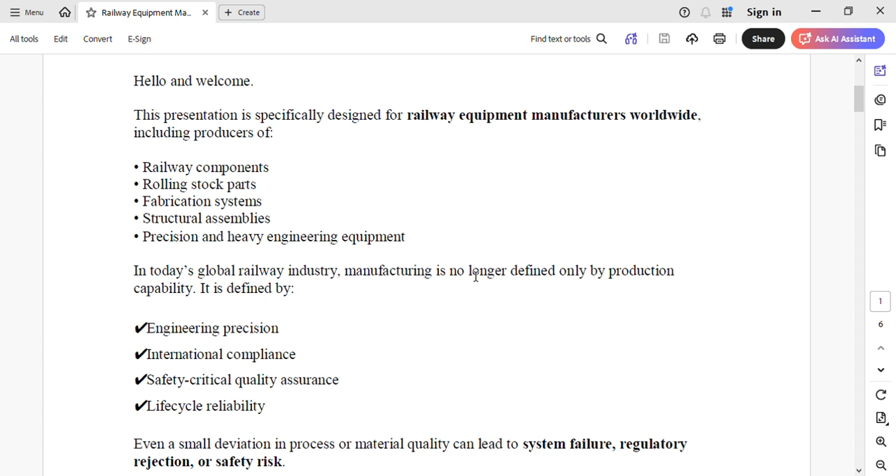In today's global railway industry, manufacturing is no longer defined only by production capability. It is defined by engineering precision, international compliance, safety critical quality assurance, and life cycle reliability. Even a small deviation in process or material quality can lead to system failure, regulatory rejection, or safety risk. This is why leading manufacturers are now focusing on structured engineering systems and ISO based quality frameworks.

Global railway industry expectations. The railway sector is one of the most safety sensitive and regulated industries in the world. Manufacturers are expected to comply with ISO 9001 quality management systems, IRIS International Railway Industry Standard, EN Railway Standards, and ASTM, DIN, BIS specifications based on regions.

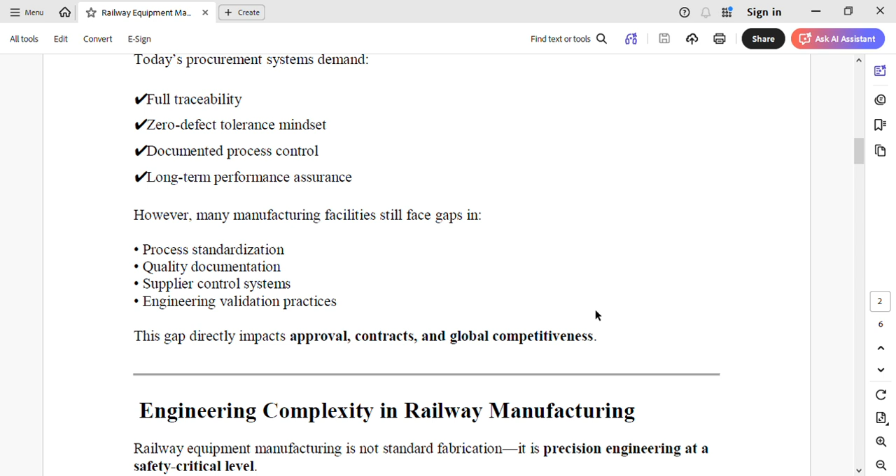Today's procurement system demands full traceability, zero defect tolerance mindset, documented process control, and long-term performance assurance. However, many manufacturing facilities still face gaps in process standardization, quality documentation, supplier control systems, and engineering validation practices. This gap directly impacts approvals, contracts, and global competitiveness.

Now, engineering complexity in railway manufacturing. Railway equipment manufacturing is not standard fabrication. It is precision engineering at a safety critical level. Let us understand the technical depth involved.

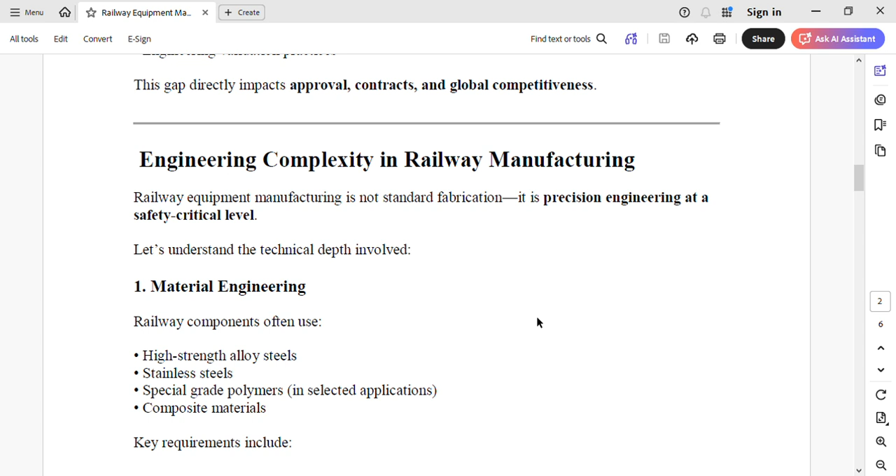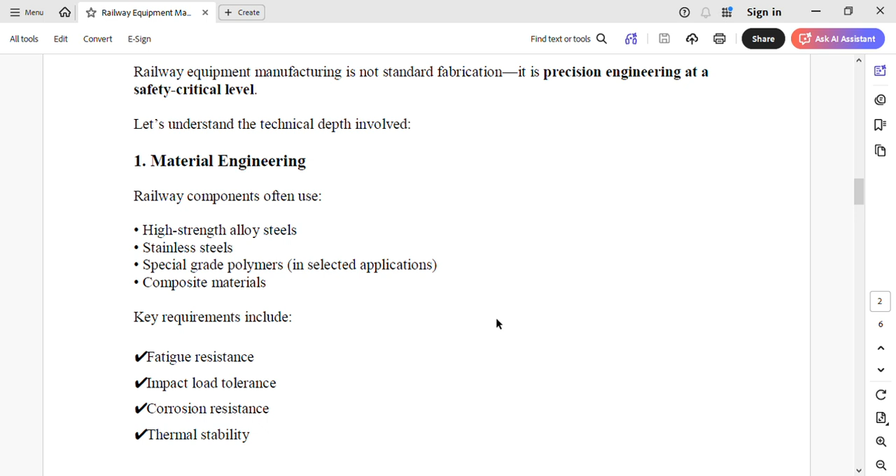First, material engineering. Railway components often use high strength alloy steels, stainless steels, special grade polymers in selected applications, and composite materials. Key requirements include fatigue resistance, impact load tolerance, corrosion resistance, and thermal stability. Any inconsistency in material selection or treatment can lead to structural failure under dynamic load conditions.

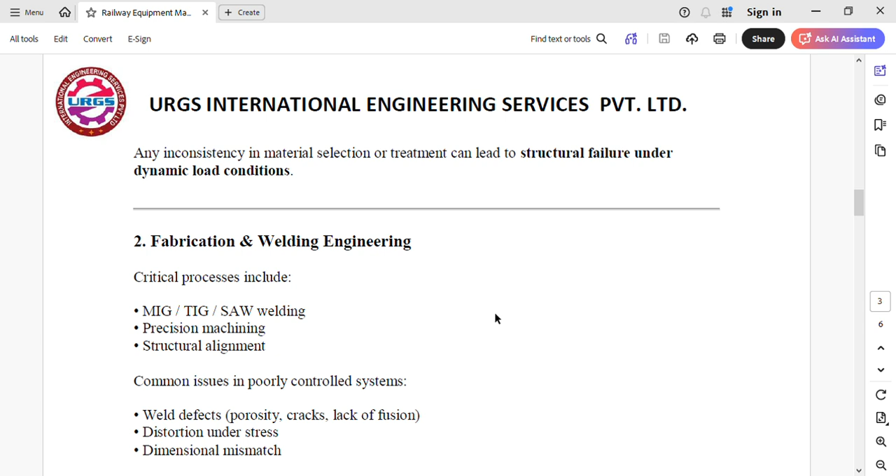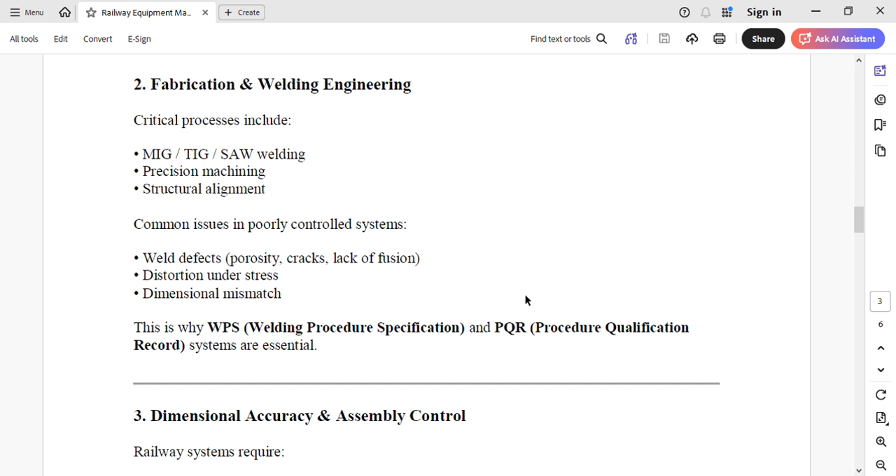Second, fabrication and welding engineering. Critical processes include MIG, TIG, SAW welding, precision machining, and structural alignment. Common issues in poorly controlled systems include weld defects, porosity, cracks, lack of fusion, distortion under stress, and dimensional mismatch. This is why WPS, welding procedure specification, and PQR, procedure qualification record systems, are essential.

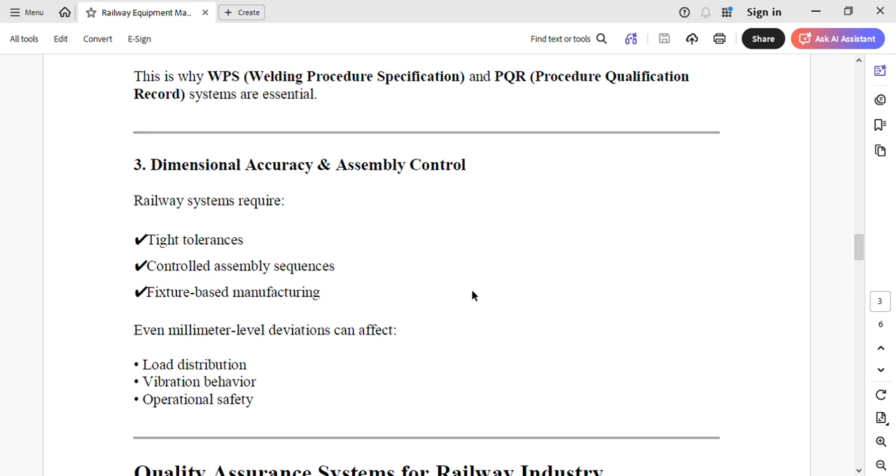Third, dimensional accuracy and assembly control. Railway systems require tight tolerances, controlled assembly sequences, and fixture-based manufacturing. Even millimeter level deviations can affect load distribution, vibration behavior, and operational safety.

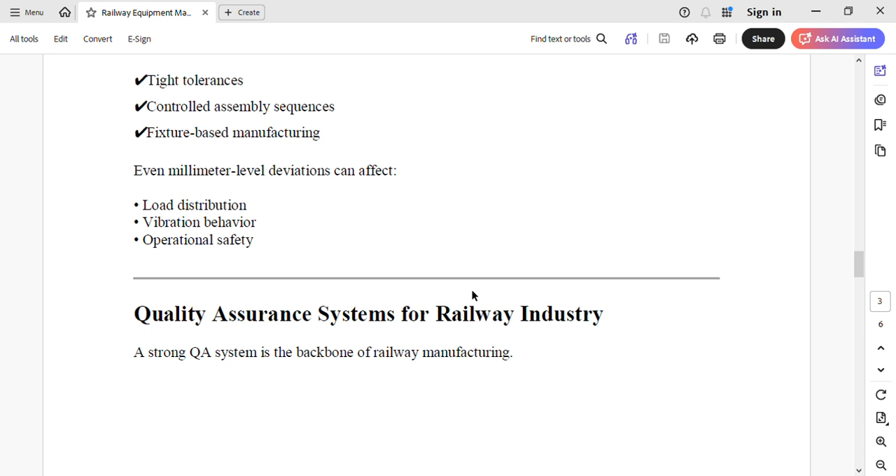Quality assurance systems for railway industry. A strong QA system is the backbone of railway manufacturing. Key inspection systems include non-destructive testing, ultrasonic testing, radiographic testing, magnetic particle testing, dye penetrant testing, dimensional inspection systems using precision tools, material certification and batch traceability, and fatigue and load testing protocols.

However, the real strength lies not in testing but in preventive quality systems, root cause analysis, corrective and preventive actions, and statistical process control. Now, ISO and railway compliance systems.

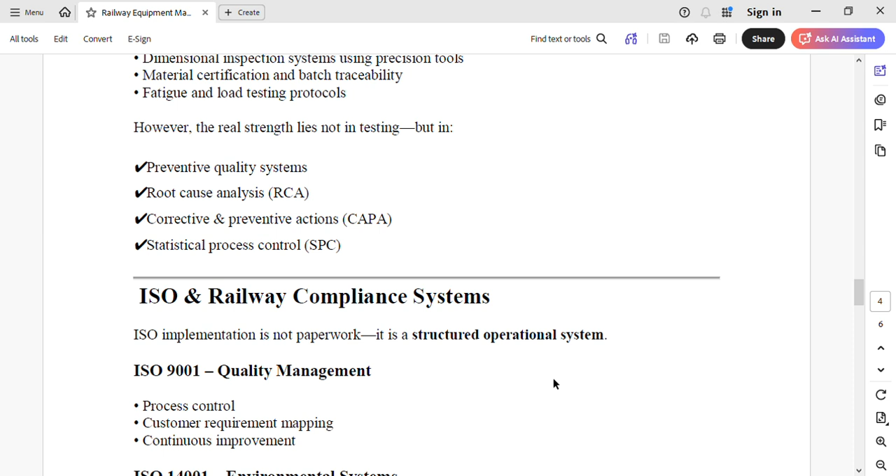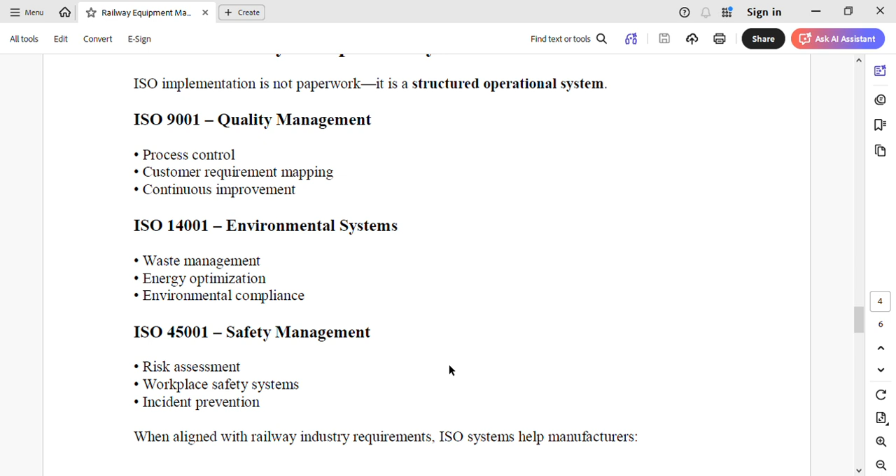ISO implementation is not paperwork. It is a structured operational system. ISO 9001 covers quality management, process control, customer requirement mapping, and continuous improvement. ISO 14001 covers environmental systems, waste management, energy optimization, and environmental compliance. ISO 45001 covers safety management, risk assessment, workplace safety systems, and incident prevention.

When aligned with railway industry requirements, ISO systems help manufacturers pass audits smoothly, enter global supply chains, and build long-term client trust.

Now, the role of engineering consultancy in transformation. This is where structured engineering consultancy becomes critical. A specialized consultancy like URGS International Engineering Services Private Limited supports manufacturers in, first, engineering optimization, process stabilization, production efficiency improvement, and equipment performance enhancement. Second, quality system development, ISO implementation, documentation structuring, and audit readiness preparation.

Third, technical gap analysis, identifying hidden process inefficiencies, root cause failure identification, and risk mitigation planning. Fourth is training and skill development, operator training, engineering team development, and quality awareness programs. The objective is not just consultation, it is implementation and measurable improvement.

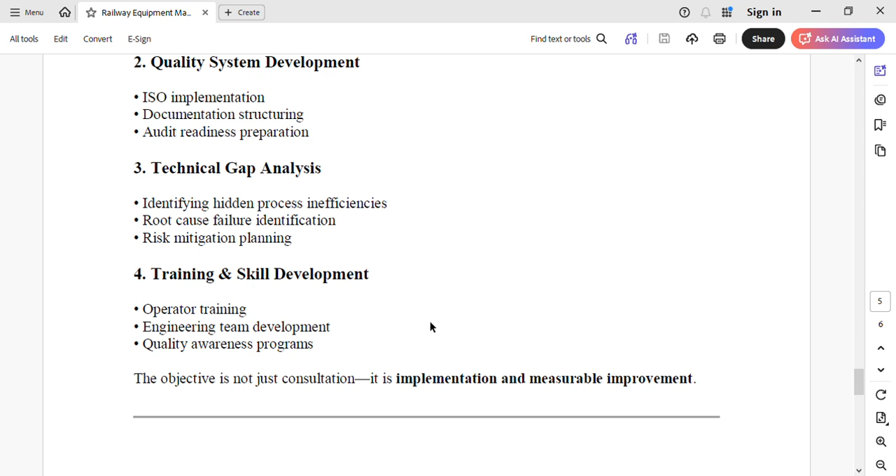Now, next is business impact and market advantage. When engineering systems are properly structured, manufacturers achieve higher acceptance rates in global tenders, reduce rejection and rework costs, improve operational efficiency, increase OEE, strengthen audit performance, and enhance brand credibility in railway supply chains.

In a competitive global railway market, compliance and engineering excellence are not optional, they are mandatory for survival and growth.

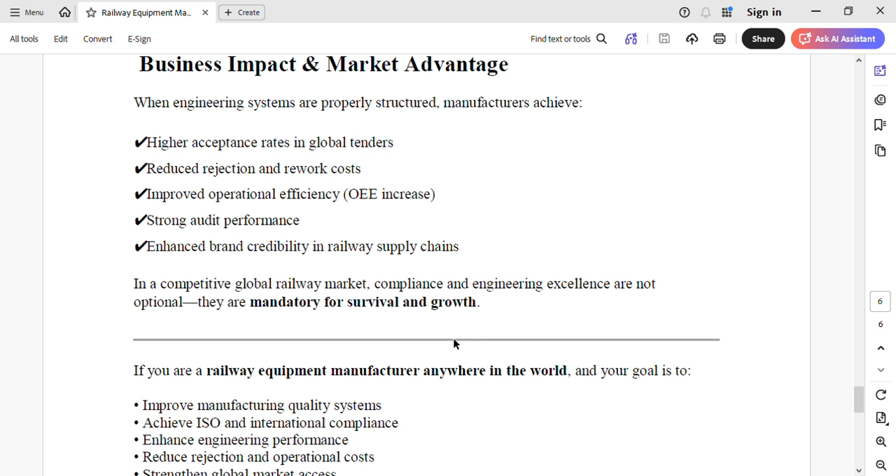If you are a railway equipment manufacturer anywhere in the world and your goal is to improve manufacturing quality systems, achieve ISO and international compliance, enhance engineering performance, reduce rejection and operational costs, and strengthen global market access, then URGS International Engineering Services Private Limited is your strategic engineering partner.